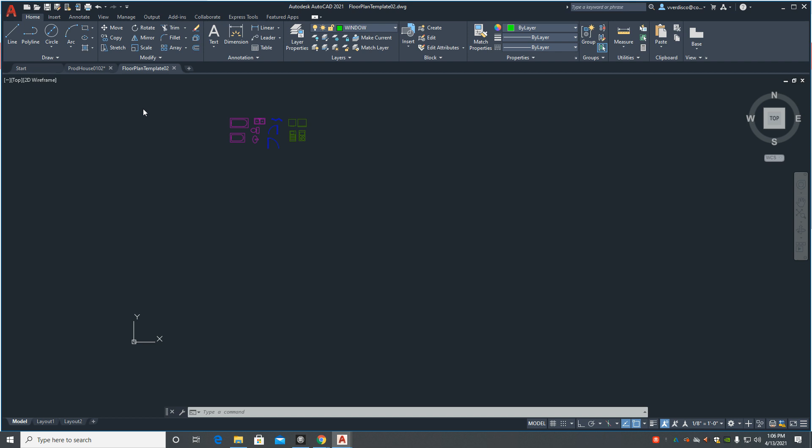What I've done is I've printed this out on paper so I don't have to keep referring back to it. But for you guys, you're going to start out by downloading the floor plan template '02. This is good because number one, it's got some fixtures in it, and number two, you have your layers all preset for you, and a couple other things running in the background to help you out.

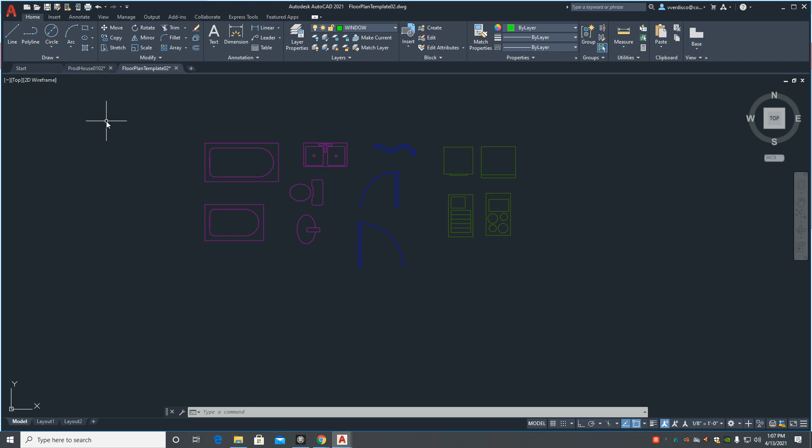So basically what I would do is open this and then go to save as, rename it and do something with your name and maybe say floor plan or something like that. I'm calling this Prod House 0102 - but that's my name. All right, let's get started here.

So we're working with an outer wall, which is a rectangle. It is 30 feet this way and 40 feet this way. Let's get started with the line tool, and I'll draw this here. I have my fixtures up here also.

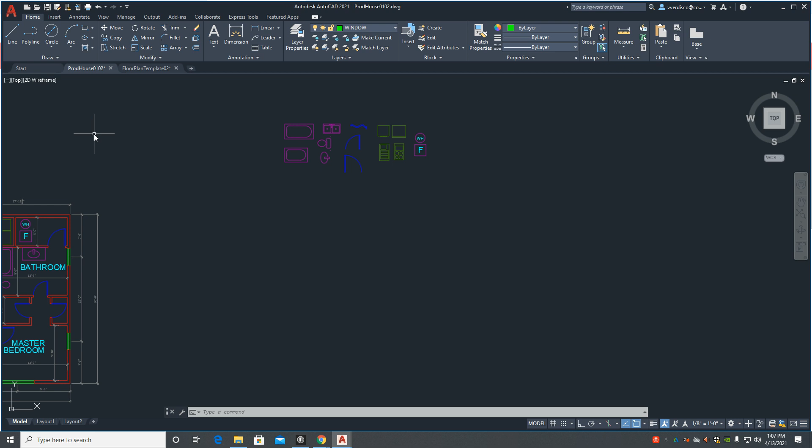So let's get the polyline. Let's make sure we are on the wall layer, and let's start with our 40-foot line, making sure I have the ortho turned on. I think I'm going to go parallel here - you won't have this, but I do. So we're going to start with our 40-foot line.

Remember, this is a polyline. 30 feet this way - don't forget the foot symbol, don't work with inches. Let's go 40 feet again and bring it right down to complete it. Again, it's a polyline, so it's one big solid line.

Now, all of the walls on the outside are 6 inches thick. So let's do a little shortcut and go to the offset tool and put in a distance of 6. Click here, drag inside, and there you go. So now all of the exterior walls are done.

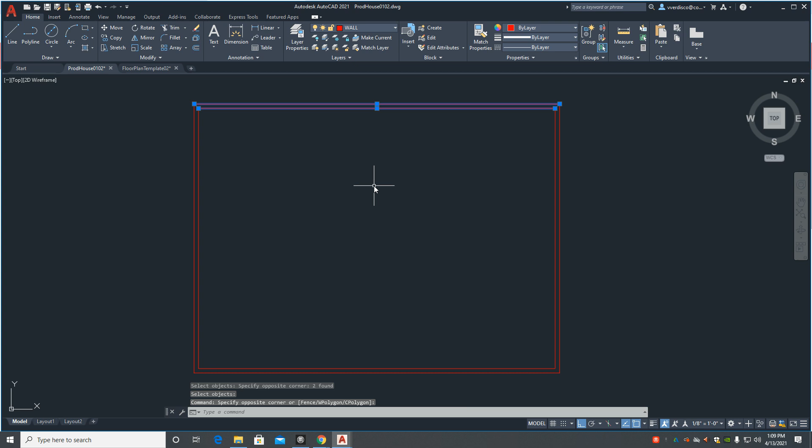We're going to be cutting out some windows and doors on the exterior, so we're going to need to explode that. I'm going to go over here to explode, select it, spacebar, and now it is exploded - separate sides altogether. All right, let's begin with putting in the windows and the doors.

So these windows are the large ones. They're 6 feet. And the door - the door should be 3 feet. All right, so 6 feet and 3 feet.

And you'll see this 6-foot window is centered on 9 foot 3 inches. So let's get this wall here. We're going from the exterior wall, and we're going to go 9 feet dash 3. You could do the inch symbol if you want to, which is the quotation, but you don't have to. Let's go ahead and offset that, just like that. Now that's going to give us a center for the window.

Now remember, it's 6 feet, so let's do this. First, I'm going to trim this to get this out of the way because it's annoying. We've got this center mark. Let's offset 3 feet on each section. Let's click the center and go this way, and let's click the center and go that way. All right, now let's go back to the trim tool.

Now, we're going to leave that center mark because that's going to mark the center of the door, which is coming up next. The door is 10 foot 9 set over. So let's take a look here - see, 10 foot 9 inches at the center of the door.

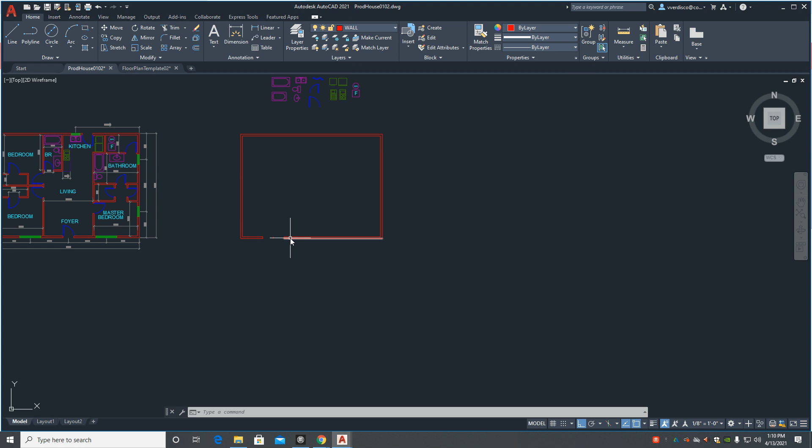So let's offset this center piece by 10 foot dash 9, it over like that. And remember, it is a 3-foot door, so half of 3 feet is 18 inches. Let's offset this by 18 inches. And let's trim that out.

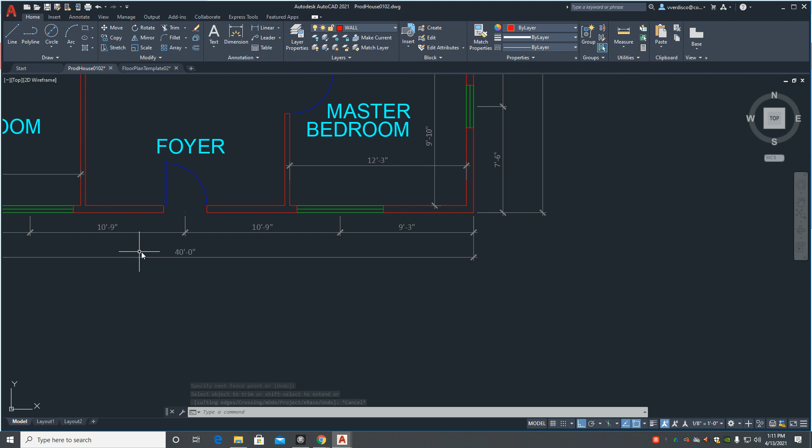So now we're going to do the next center window, 10 foot 9 for that, and that also is a 6-foot window. So 10 foot 9, offset - offset by 10 feet 9. Okay, offset it over. And again, this is a 6-foot window, so we'll do 3 feet on each side of it, and that'll center a 6-foot window on this middle line, and trim it out.

All right, so that takes care of all of the gaps for the front. We're going to come back later and put the windows and doors in. Let's work our way around the perimeter. Let's do this wall right here.

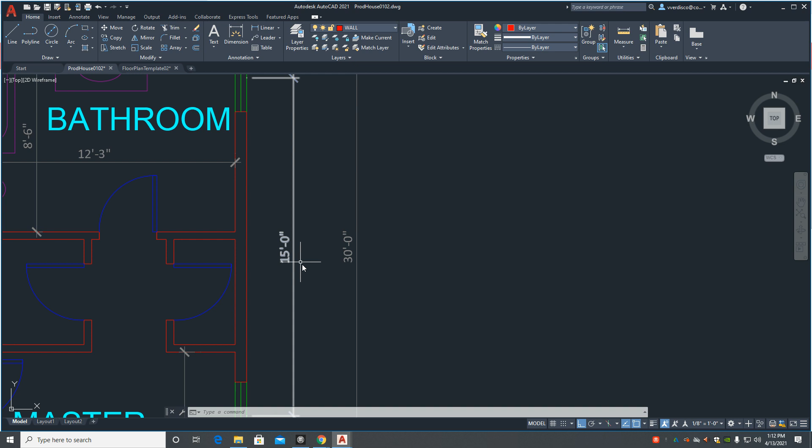Let's slide it over. 7'6" for this, and this is 15 feet even for this one. And these should be 3-foot windows. They are. Okay, so again, we're starting with this outside wall right here.

Make sure you do it from the outside wall. And we're looking at 7 foot dash 6 inches. Pull it off like that. Now you don't have to, but I like to trim it out because that annoys me.

And again, it's 3 foot, so that's 18 inches on each side. So 18 for the offset. Put that in like that, and let's just trim the wall out.

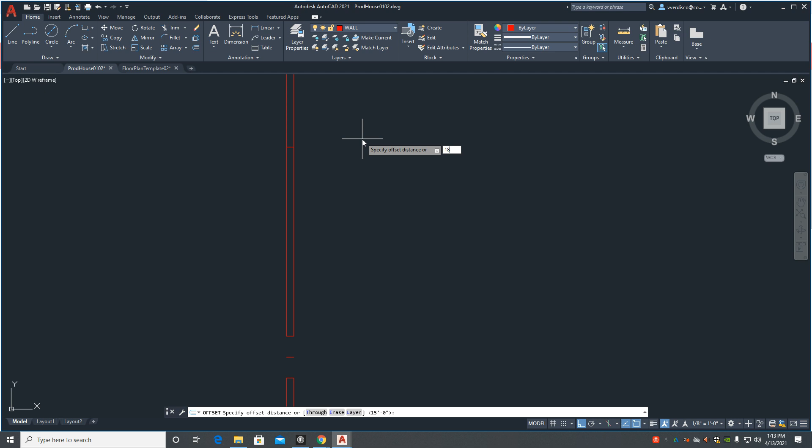All right, off the base of this, it was 15 feet, so offset by 15 feet. And there it is. Again, we offset by 18, each side will give you a total of 3 feet. Whoops, Control Z. And let's trim that guy out. All right, now that's it for this wall, so we can go ahead and remove these.

Let's take a look at the back wall here. So the back wall, it does have a window right here, but I see that I don't have the information on centering this door, so I'm going to take care of that right now. Let's find out where the center of the door is. I'm going to quickly put in a notation from here to the center here.

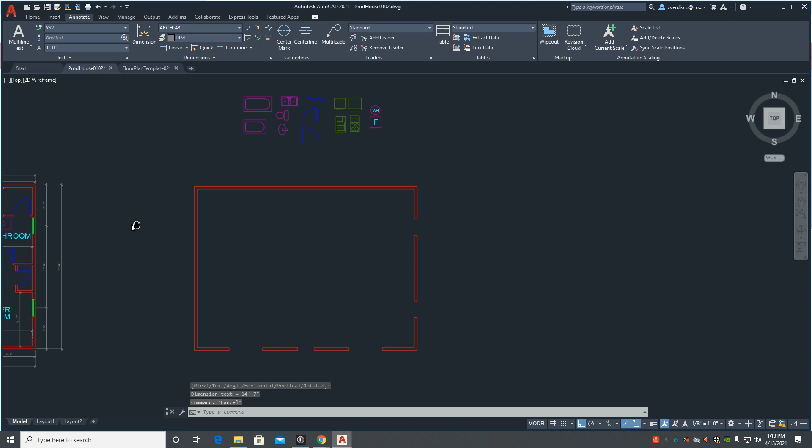14.7. All right, so we'll do that one first. So we're going to do 14.7 from here. Offset 14 feet and 7 inches. Offset it like that.

And that door, 3 feet. Okay, so 3 feet we know is 18 on each side. Here's what happens when you don't do that, when you don't trim, and that's okay. Okay, let's get this done. And we'll get rid of this. And these actually have to get trimmed because that has to have the wall caps on it.

All right, and then we said the other window, which is a 3-foot window, was 17 feet 11 3/8. So that's good to do that one because that's a little tough. So let's offset, and going to put in the distance of 17 feet dash 11 dash 3/8. And then right there. Okay, so we got to go 18 inches on each side of that.

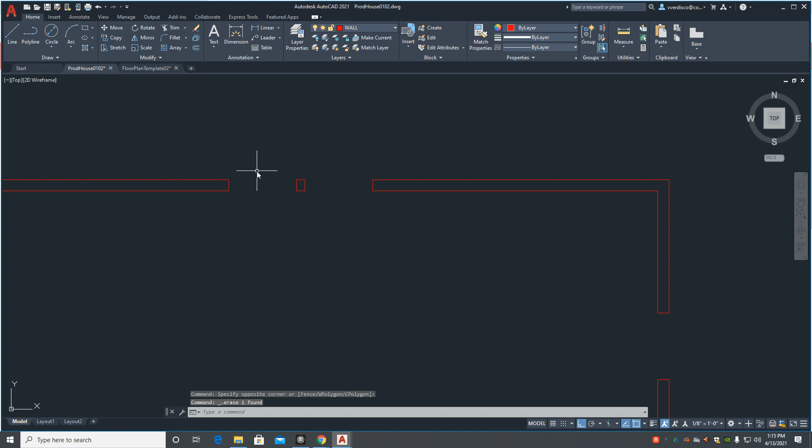So I'm actually going to trim it because I showed you how annoying that is. And 18, let's put that one in here and here. And let's go ahead and trim that out. Now that's it for the back wall. Clean that up. This will be the door. This will be a window. We have to remember that.

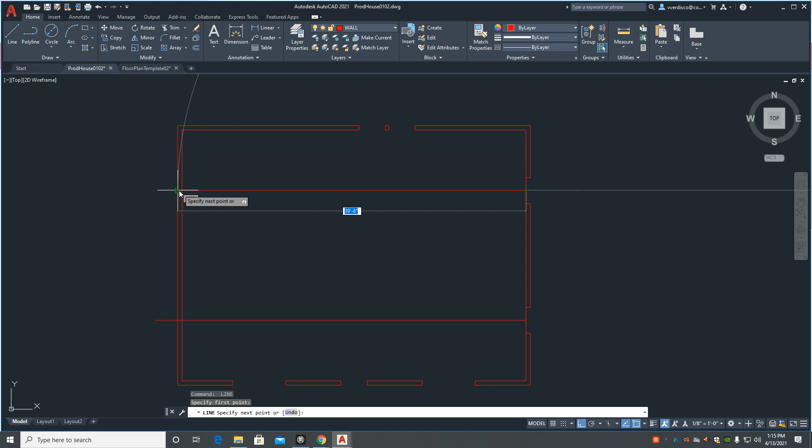Now we're going to do this. You're looking at 2 windows here, and they are exactly lined up with this. It's symmetrical. So let's do this. I'm going to put a temporary line here. And I guess it would have been more efficient to not delete those dashes, but I forgot. So whatever. But instead of measuring, I'm going to just draw a line straight across here and here. And then trim it out.

And that quickly puts them in. Let's not forget to get these ugly things out of here. Okay. 18 on each side because they're symmetrical. So 18 will pop here and here. And while we've got the tool going, let's just put this one in too. And let's trim. And we trim.

Okay, so we've got all of the exterior windows done on here. And the next thing to do would be putting in some interior walls. So let's go ahead and do that. So let's start with this one.

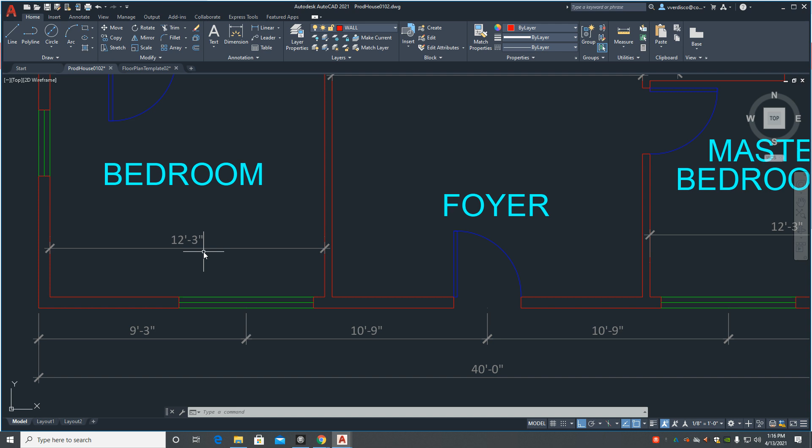It is 12'3", and it goes all the way from one end of the house to the other, 12'3". So it's from the interior. Remember, you're measuring from the inside wall right here. So offset at 12'3". Let's bring it over like this, and let's just extend it out. So we're going to get the extend tool and pop that up.

All right, so remember, it's an interior measurement, so we need to put the thickness on this wall, which interior walls will be 4 unless they're supporting a toilet, and we go to the outside of it. Now, let's make sure we are at 12'3" for the inside. Perfect. All right, let's just work our way.

Do we want to go up and down or work our way left to right? Let's work our way left to right, and then we could trim stuff out.

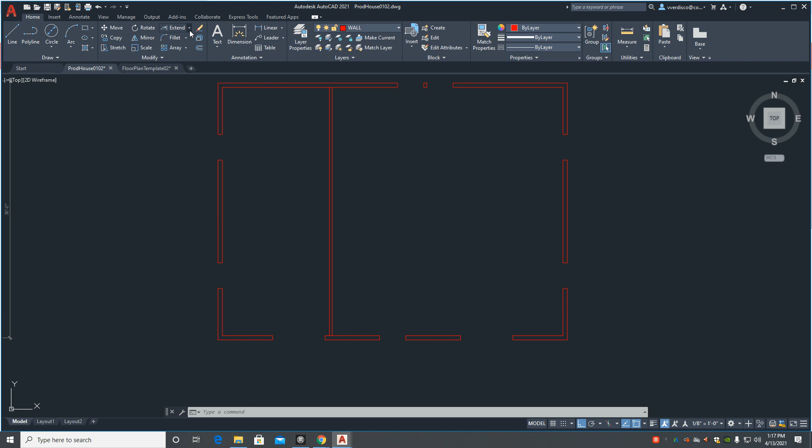First thing is, I like to get in the habit of going back, and anytime I have one of these going on where the wall ends, it has to be open like that. This way I don't forget. So I take a little longer to do that, but for me, that's how it works.

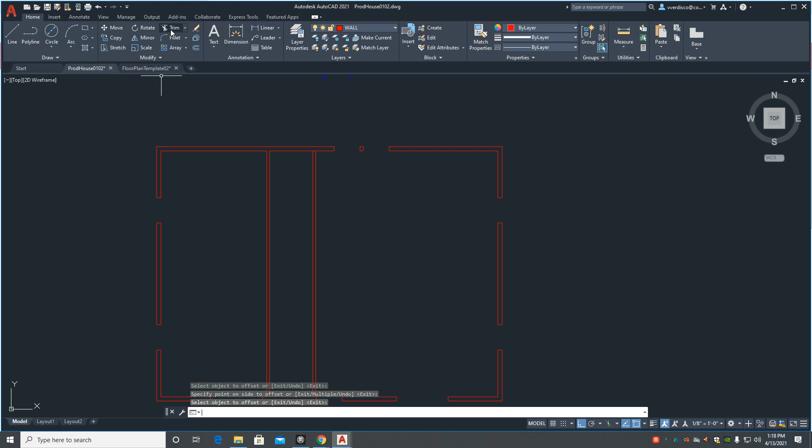So this bathroom is an interior distance of 5 feet. So let's go ahead and offset this wall by 5 feet. And we're going to move it over to 4 for the offset right here. And let's go ahead and trim this out. Trim it. There we go. Now, all this will get cut off later, but let's just work with these vertical lines first.

So nothing here. We've got this wall right here, and that wall is 13 foot 10 inches off of this wall right here. So we're going to go from this wall over 13 foot 10, but I think it's going to get confusing for you guys. So why don't we trim this out for the bathroom? Let's go. I changed my mind. I'm going to fix this.

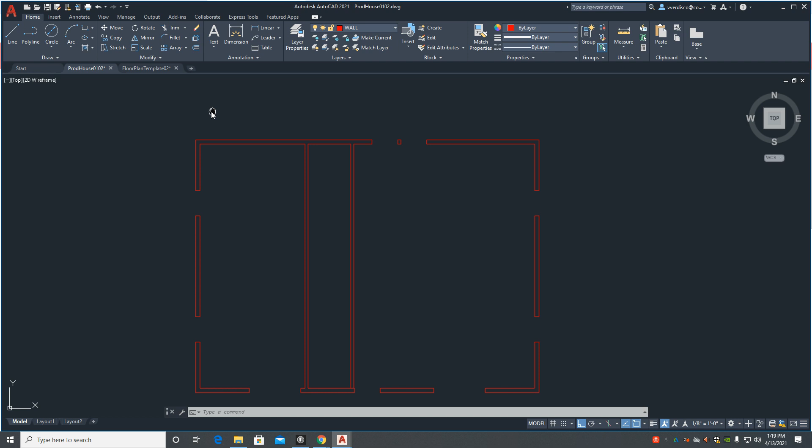So from here to the inside of the wall, you've got 10 feet. So what I'm going to do is something a little different here, actually. Let's do this. I'm going to get the line tool and go right about here. It's another way to go. We're going to go 10 feet, and then I'm going to pop it like this, and then just extend it on over like this. Now we can get rid of that line. So if you don't want to offset, this is just another way to do it.

All right. So it's 10 feet on the inside, so we need to offset this by 4 so that it's a wall. Now what we're going to do is we're going to first extend these here, and then let's go ahead and trim off the bottom part.

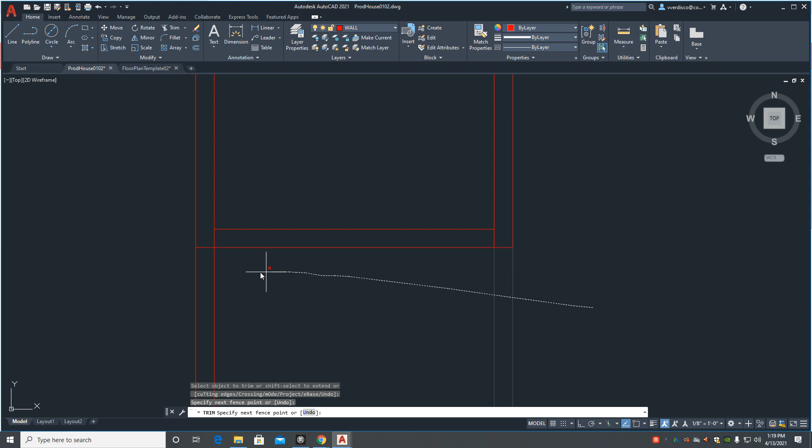Oh, we didn't want both of these, though. We're going to undo that. We only want this one gone. Because that's the wall for the bedrooms here. That's this wall right here.

All right. Let's go inside and let's clean up this stuff, though. That and that and that. Again, a lot of people do that at the end, but then you end up missing one or two, and it's not awesome.

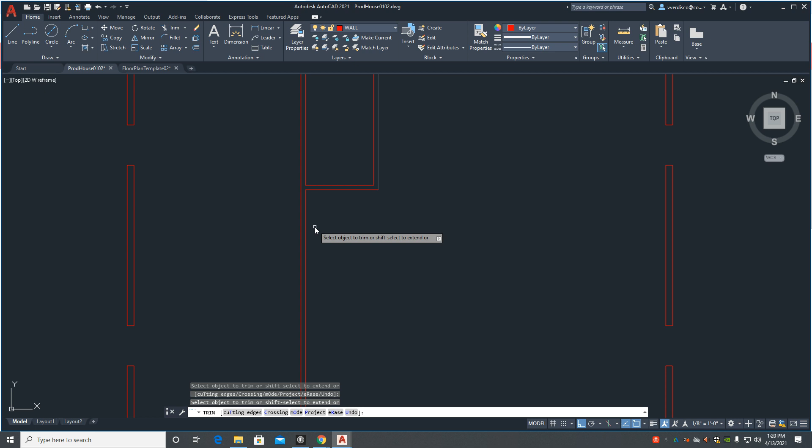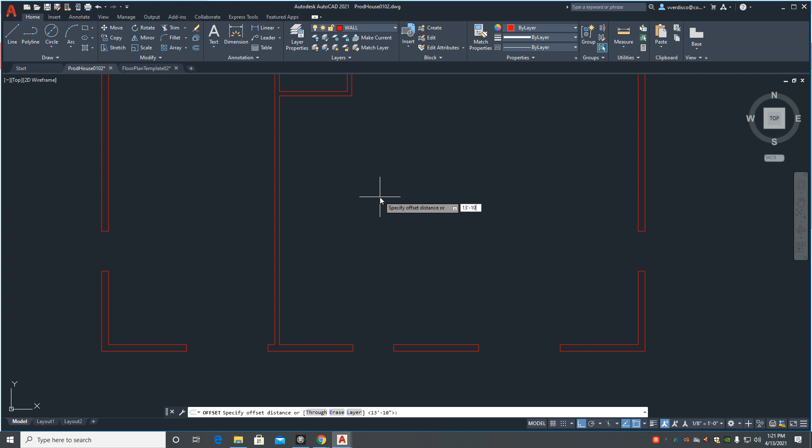So, all right, let's go back to this space here for the foyer, which is this major wall, which goes through the whole house. It's 1310. All right, so let's do that. Offset by 13 feet, dash, and then 10 for the inches. Something's gone wrong. Let me try that again. Offset by 13 feet, dash, 10 inches. There it is. And again, it goes through the whole house.

So let's go ahead and extend it. Now, if this is measured properly, we should bump right into this. Perfect. That means it's all measured perfect. If it doesn't line up, you mismeasured something.

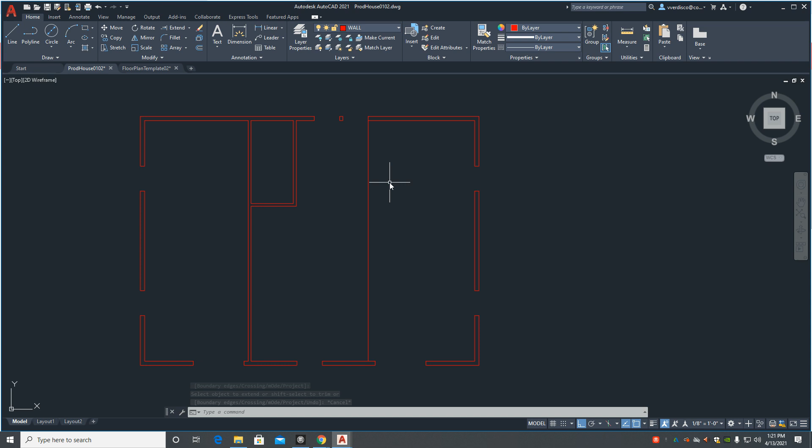All right, so we went interior 13 feet, so we've got to put the thickness in of 4 inches here. So let's go ahead and do that. 4. And we can trim this on both sides because it is going to get chopped up, but not on the ends. That. Okay, so there's that interior wall.

All right, let's go back over here. I think that's all for the verticals. There's a couple of little ones here and there, but we'll get to those later.

Let's put these closets in this end right here. So let's see. We do not have a measurement for the length from here to here and where the split is. Now, I know I made it symmetrical, and this is centered on here. And it is, it's 30 feet, so it should be 15.

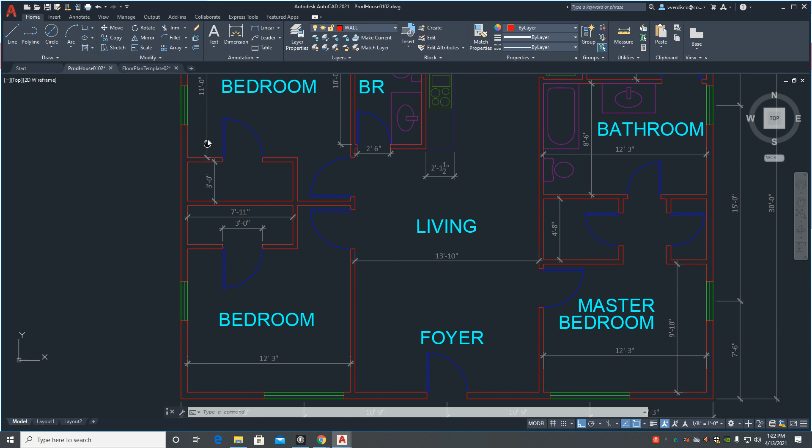Let's take a look here. Looking at, this is 11. And then this, that makes this 11. That's 22. Plus 3 and 3 is 6 in the thickness of the wall. So it should be centered on there.

That looks good. Okay. So we're back on the wall layer here. Let's go right to the center. And bring it like this.

That bell was the end of 7th period. We are into X time now.

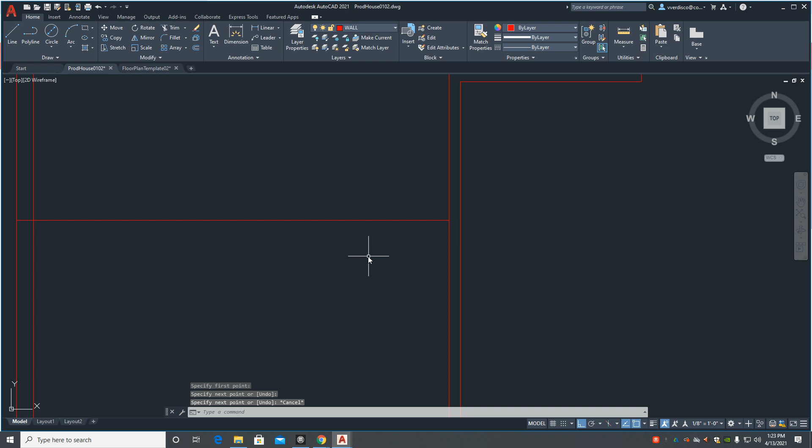Okay, so now we've got the center. And I think I'm going to pause this for now and do a part 2 on this. This is getting a little long.